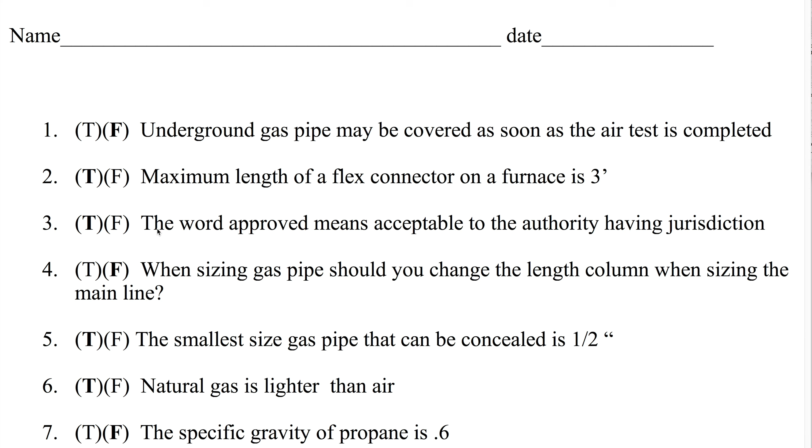Maximum length of a flex connector to a furnace is 3 feet. That's true. The only thing that's longer than that, and there's a 6-foot maximum length, is for a stove, because you have to be able to move the stove out, or a dryer for the same reason. So maximum length is 3 feet, unless it's a stove or a dryer or other movable appliance. The word approved means acceptable to the authority having jurisdiction. That's obviously true.

4. When sizing gas pipe, you should change the length column when sizing the main line. I don't know if any of you have gone through my video on gas pipe sizing, but it gives you an idea there. You size two ways. You size for the main line, and then you size for the drops. And of course the drops are what are going to the appliances. When you size gas pipe, you do not change the length column when sizing the main line. You take the appliances farthest away and you size the line with that length when you're using the charts.

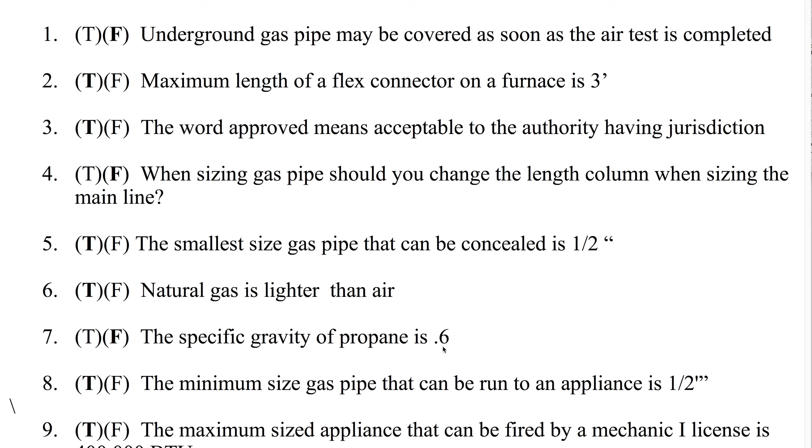Okay, the smallest gas pipe size that can be concealed is 1/2 inch. Now this is a local code, and it's true of course. It's not in the IFGC, I never saw it in there, but that is a local code. Natural gas is lighter than air. That's true. It has a specific gravity of 0.6. The specific gravity of air is 1, so obviously that is true. The next one, pretty much related, the specific gravity of propane is 0.6. That would be what natural gas is, so it's false. It's actually 1.5. Okay, the minimum gas size that can be run to any appliance is 1/2 inch. Now that's true. I don't see that in the IFGC either, but that's a local code.

The maximum sized appliance that can be fired by a Mechanic 1 license is 400,000 BTUs. This is common in most jurisdictions. There's a Mechanic 1 and 2, and they may have different words for it, but anything over 400,000 you have to be a Mechanic 2, so that is true. A gas shutoff valve shall be no farther than 6 feet from the appliance. That's true. That is in the IFGC. 100,000 BTUs equals 1 therm. That is correct.

You may pressure test gas piping systems at 10 pounds with a 30-pound gauge for 15 minutes. Now that is true. The IFGC has a rather complicated formula for charging with as low as 3 pounds. I haven't seen anybody actually use that because it's kind of hard to use. This is actually very simple, and it's a higher pressure than the IFGC requires. Many jurisdictions will allow you to use the 10 pounds on a 30-pound gauge.

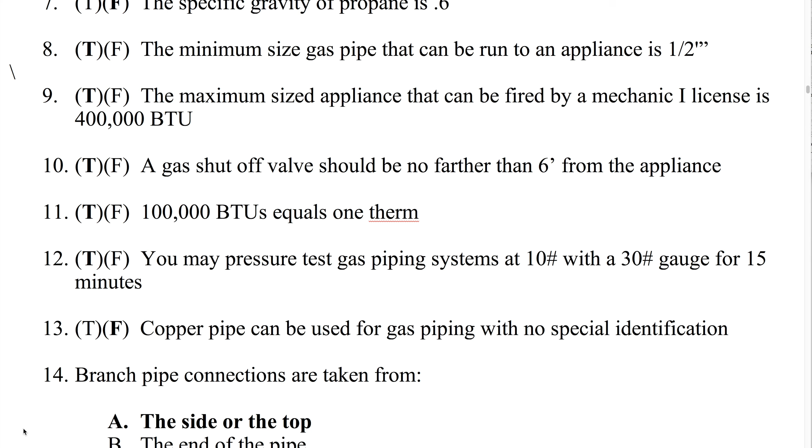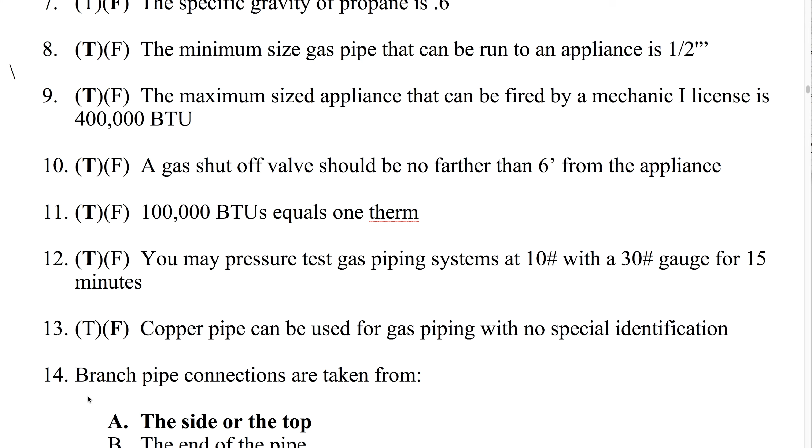13. Copper pipe can be used for gas piping with no special identification. That's false. You can use copper pipe. I don't think it's a great idea, but it has to be marked as natural gas. 14. Now we got some multiple choice here. The branch pipe connections are taken from: the side or the top. That is the correct answer. Virtually nobody does that, but that is the code. We almost always take them off the bottom. But that is the correct answer.

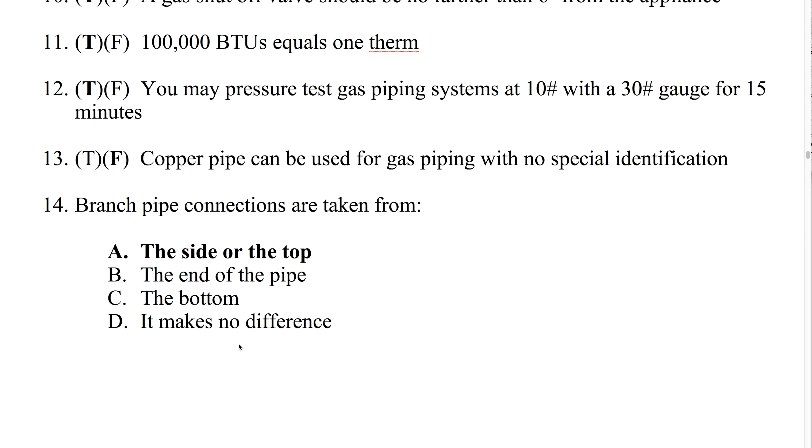Okay, 15. What is the natural gas pressure on the outlet side of the gas meter in pounds? Okay, it's not 7 pounds. That would be 7 inches of water column. If I did it in pounds, it is 1/4 pound.

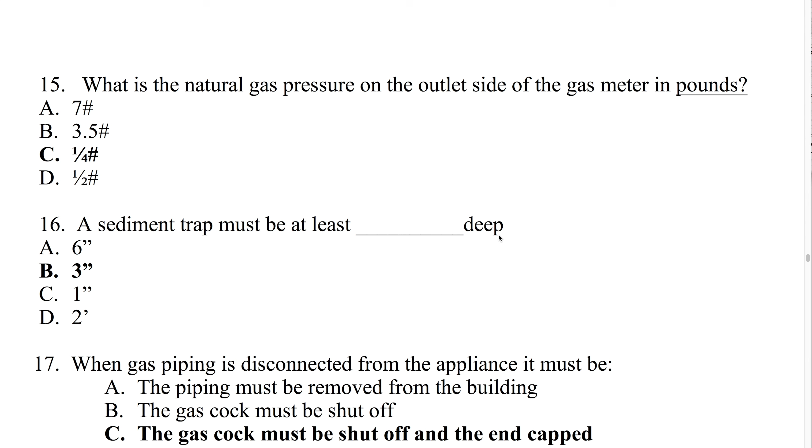16, a sediment trap must be at least 3 inches deep. Now that's a local code too. The IFGC does not give a depth for a sediment trap on appliances. They say it can be as short as you want it to be. One more on that thing. They have been talking about eliminating this altogether, which makes sense because there's nothing in the gas but gas. The sediment trap is just supposed to catch crap in the gas. There's nothing in it.

So gas piping, number 17, is disconnected from the appliance. It must be removed from the building, obviously not. Gas cock must be shut off. Well, the gas cock should be shut off. The gas cock must be shut off and the end capped. Okay, why do we care? If you were to leave this and maybe you replace the appliance or whatever, you don't want it so that someone could actually turn on a gas cock and it would leak out. So you have to have the end cap too. And obviously pipe to a nearby window with the window open is a little silly.

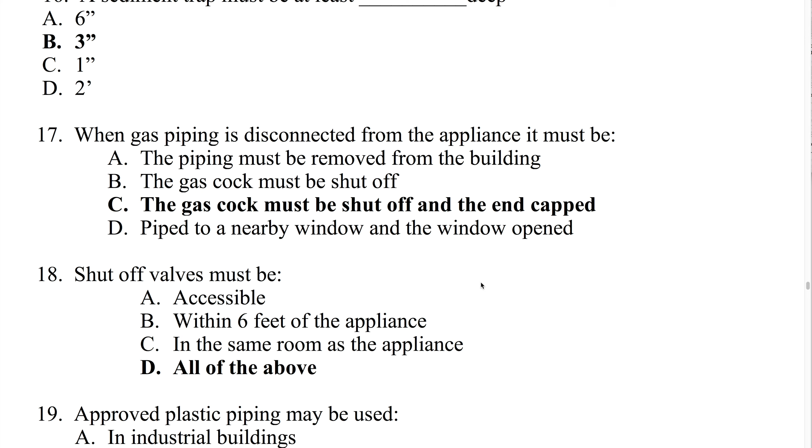Shut-off valves must be accessible, within 6 feet of the appliance, in the same room as the appliance. That is all of the above. It's fairly simple. It has to be accessible without removing things. Like you can't put it inside the appliance. The 6 feet was a question above. In the same room as the appliance, that's obviously common sense, that you wouldn't have to go to another room to shut off the appliance.

Okay, approved plastic pipe may be used in industrial buildings, outside and underground, no limits on its use, in concealed spaces. Obviously it's B, because we use it outside and we put it underground. We do not put it inside buildings, at least not yet. There is some flexible stainless steel. You can use that, but plastic pipe, no.